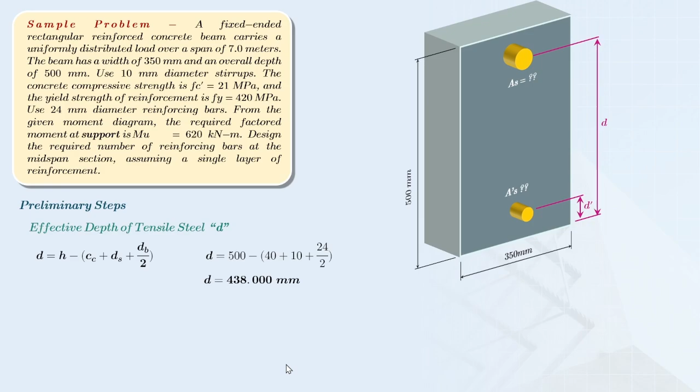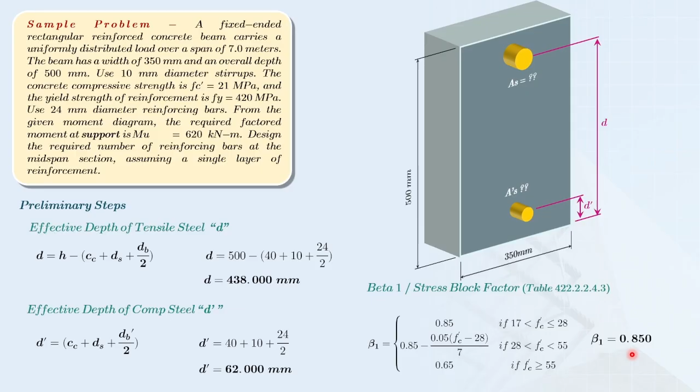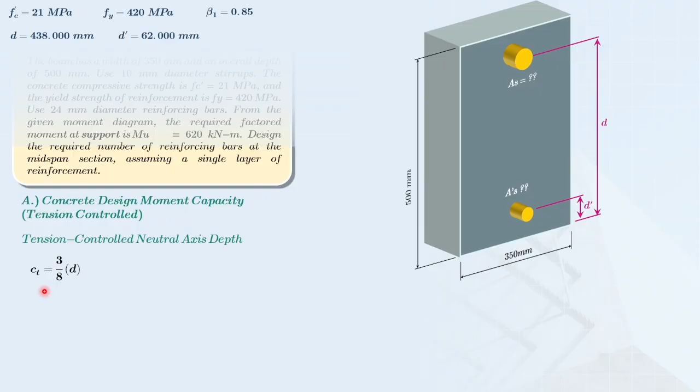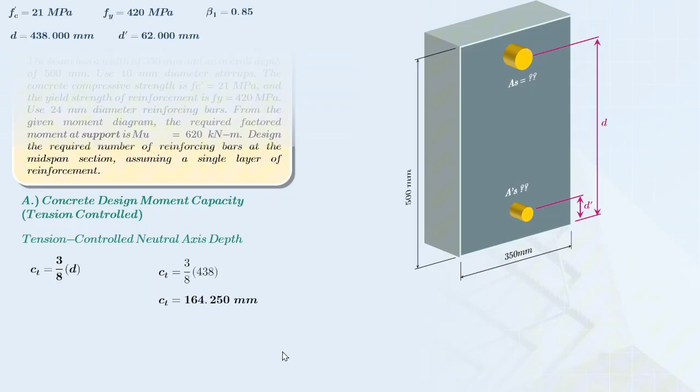For the value sa ating stress block factor or the value for the beta 1, same pa rin naman since yung ating f'c is equal to 21 megapascal. So, yung beta 1 natin is 0.85. Okay? Ngayon, let's proceed naman sa pagkuha natin ng concrete capacity natin. Of course, it should be tension controlled. So, ibig sabihin lang nito, kukunin muna natin yung neutral axis depth ng tension controlled. We will use the 3 over 8 multiplied by the effective depth, which is equal to 164.25 millimeters. And then, let's compute for the moment capacity ng concrete under tension controlled.

I will use this formula. And then, substitute ko lang yung para sa value ng A, which is dapat naka-beta 1 times C tayo. Of course, kailangan yung ating stress reduction factor is 0.9 since tayo nga ay nasa tension-controlled section or ideally, it should be a tension-controlled section. So by simply substituting all of the given, our value for the capacity of the concrete is now equal to 289.034 kilonewton meters. Okay? So, ano ang next na gagawin natin?

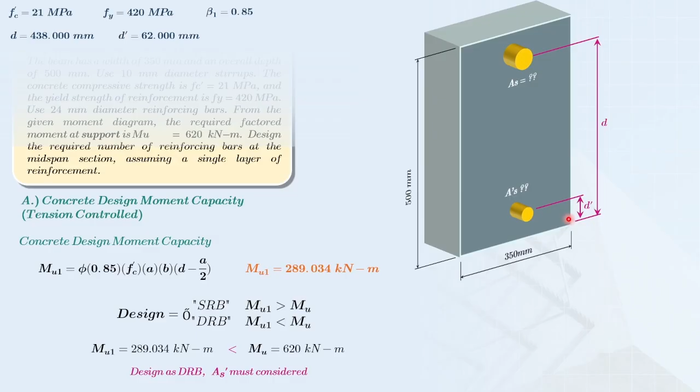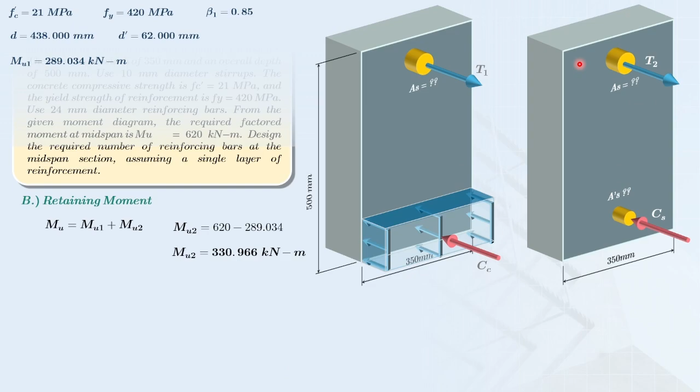Okay, so since alam na natin na this is under doubly reinforced section, we need to determine the retaining moment, which means by subtracting the given moment and the concrete capacity. So makukuha natin dito is 330.966 kilonewton meter, which is yan yung gagamitin nating information na i-carry netong ating stress diagram para sa compression steel. So let's compute first for the tensile steel reinforcements natin. Kunin muna natin yung para sa tension controlled steel area natin, itong first part ng ating steel area.

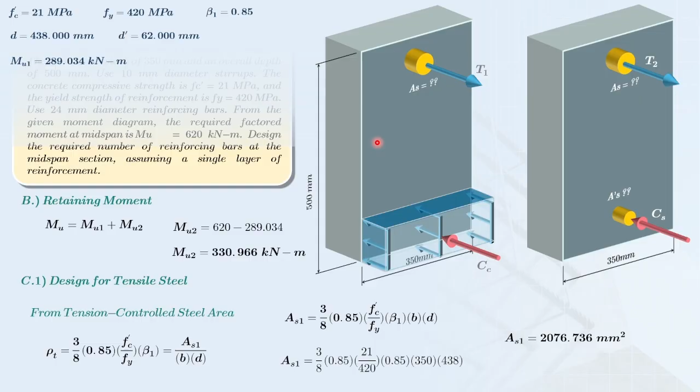So para makuha natin yan, implement lang natin yung derived formula for the steel ratio under tension controlled. Then I will equal it to the first part of the steel reinforcement divided by the gross area. Kapag dinerive natin yan, ito yung magiging itsura ng ating first part ng ating tensile steel. And then kapag sinubstitute natin yung mga values, makukuha natin ditong first steel area, equal to 2,076.736 square millimeter. So, after natin makuha yung value na yon, kunin naman natin yung second part.

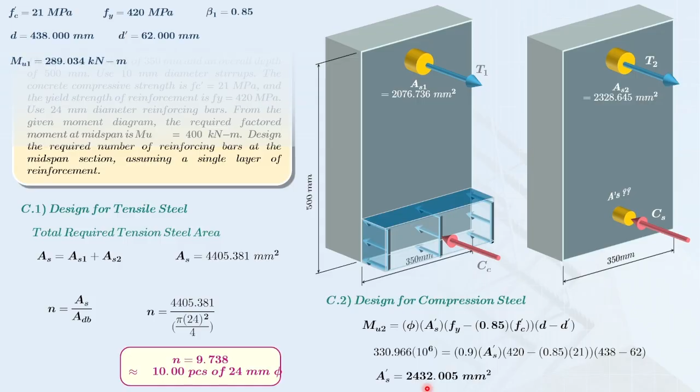So by simply substituting this one, ang makukuha natin ditong area of compression para sa ating steel reinforcement is equal to 2,432.005 square millimeter. So kapag kinuha natin in terms of number of pieces, similar approach pa rin tayo. I-divide pa rin natin siya with the area of a single reinforcement natin. This is now equal to 5.376 or 6 pieces of 24 mm diameter. So yan yung magiging final answer natin for this sample problem.